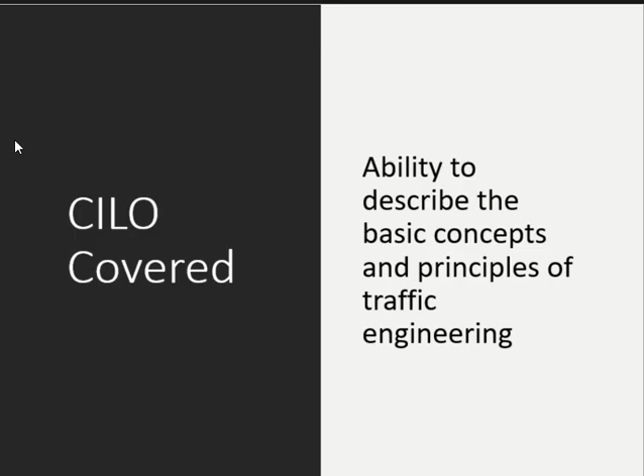The other thing you will commonly see is the course outcomes we are trying to fulfill in this course. In the slides you will see which outcome the topics are covering. These topics cover the basic concepts and principles of traffic engineering. So let us begin.

We start with the definition of a traffic stream. A stream, you may have heard the word for water streams, right? If you have gone to the water resources lab, they flow the water and show you how the waves are made and what happens with the silt and sand and so on. Doesn't work here, but there is something like this, right? Should be, okay.

So a stream means flow, right? We have data stream, water stream. When I say data stream, what is flowing? The data. When we say water stream, water. So traffic stream - but traffic is jammed, right? It doesn't flow. Agreed or not? So this is wrong then, right?

For the sake of the class, we will assume there is a traffic stream as well - forget about 7 a.m. and 5 p.m. traffic. So traffic stream means flow of vehicles. Traffic is made up of vehicles, right? So a traffic stream is made up of vehicles mainly. For the time being, these vehicles are driven by drivers, us, unfortunately.

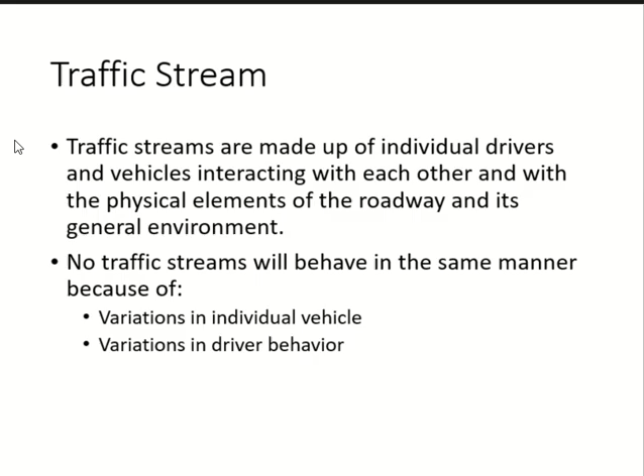Now, in the textbook and in the slides, I keep on referring to the textbook, at least so you know when I say what is written in the textbook. You will not read it, I know, but at least I am telling you this is what is written in the textbook.

When they say traffic facilities in the textbook or in the slides, they mean streets and highways. Clear? On the broader level, it can also include parking spaces as well, so parking spaces are also part of traffic facilities. This is the term they use. So when they say types of traffic facilities, they mean types of streets and highways.

What are the types of streets and highways? Tell me. Local, arterial, collector, urban and rural.

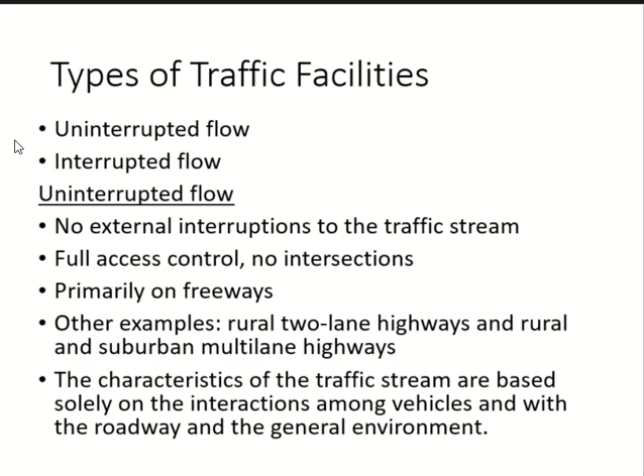But the point is that if you see the traffic jam, it's because the traffic on the highway is very high. If you see the speed is low, maybe the design speed of the highway is low. It's not because of something else. On the other type, the interrupted flow highway, you may see traffic is stopped, not because of this highway, but because of the access, because of the interruption. Got my point?

If there is nothing on the intersection, but the intersection is there, like on most local streets, you may not see any signal or sign or roundabout, but there is a street crossing, so it will be considered as interrupted. We are not looking at the sign, we are looking at the interruption itself. The interruption is the other street, not the sign. If I remove the sign, it doesn't mean nobody will come from the other side. Clear? So the interruption is the street itself.

Similarly, you can have entries and exits from parking areas. These are also considered an interruption, because these people are entering and exiting the street. So when they enter and exit, we may have to stop for them. Driveway means the parking is somewhere inside, like you're coming out of the mall. You come from the parking area, then there's a small lane in which you drive before you come to the street, right? That small lane is a driveway.

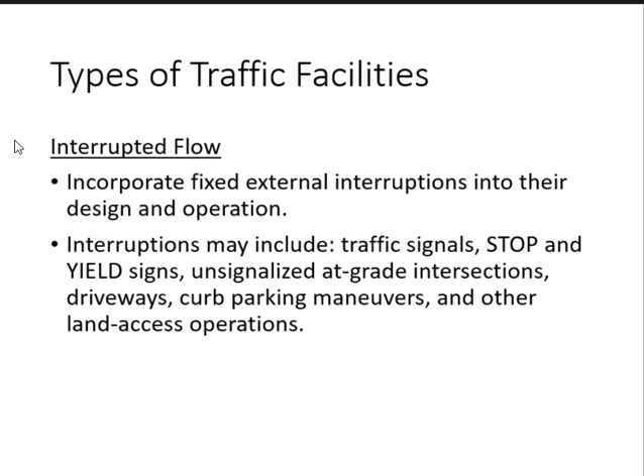Okay. So when we study traffic stream, we have to study certain parameters, certain properties of traffic, and these properties can be divided into two types. So this is now types of traffic parameters, traffic characteristics. Okay, those were types of what? Interrupted and uninterrupted. Types of what? Traffic flow. Highway traffic. Those were types of highways based on traffic flow. And this is now types of traffic flow properties, traffic flow parameters, and they can be macroscopic and microscopic.

Okay, you know microscope, right? So which one is bigger, macro or micro? Macro is bigger, right? That's why we have the store Makro, right? We don't have the store Micro. There's a store Makro, right? No? Okay. You need to go out more. Okay. But macro is bigger, right?

So bigger means you are collecting data about the whole traffic flow, the whole traffic stream. That is called macro. And if you go in more details, then we call it micro. So if you are looking at the traffic flow complete, it's macro, the scale is bigger. If you go to a smaller scale, then we call it micro. If you go inside the traffic stream, a traffic stream is made of what? Vehicles, right? So micro means you are looking at each vehicle. Macro means you are looking at the entire group of vehicles in the traffic flow. Clear? Okay.

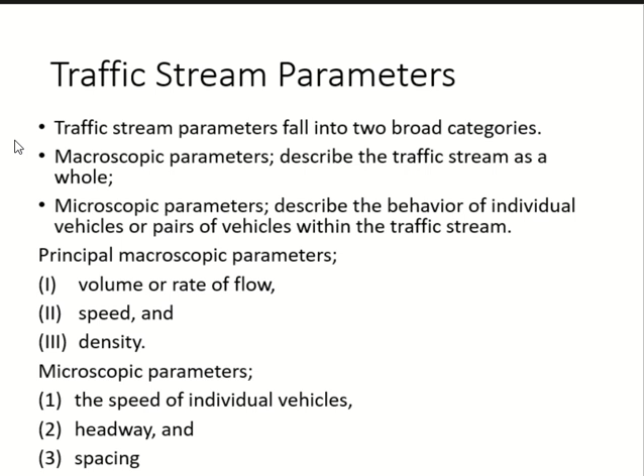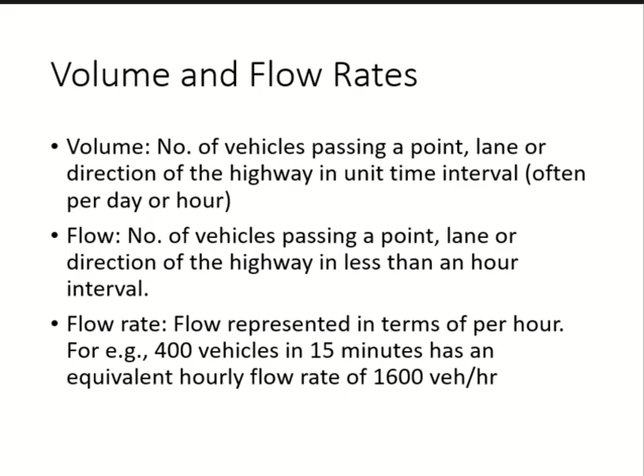It was confusing. So that means in 1 hour I can have multiple values of rate of flow. In 1 hour I can take a value for 15 minutes, convert it to 1 hour, it will be one value, right? Next 15 minutes I take another value of flow and convert it to per hour. It will be another value of flow rate. But in the whole hour the volume will be one. The flow rate can change. Clear?

So we said volume can be more than 1 hour. Usually the time interval for volume is per day or per hour. If it is per day, we call it daily volume. If it is per hour, we call it hourly volume. In some cases, we use other time intervals as well. Volume can be for the whole year as well, or for 1 week. Still volume. Anything 1 hour or more, still volume.

Daily volumes are used for planning purposes or documentation. You are planning a new highway for the future, after 20 years. You plan for it, you construct it, and after you construct it, it should remain operating for many years, right? Even 20 years is less. You want the highway to run for maybe 30-40 years. So in your planning, you are looking at the volume of the future after 30 years. So in those cases, we use daily volume. Why? What's the reason?

It's easier to calculate daily volumes because they have less variation. If you go deep, then the variation will be higher. For example, if you say I want volume for every hour for every direction, more variation, right? You will need more values. But for the entire highway for the whole day I will have one value. And daily volumes are normally combined for both directions.

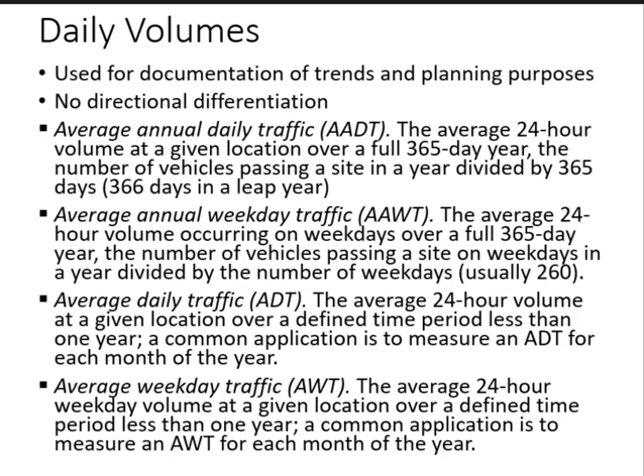And the other one, A is gone. So average of what? Weekdays. Clear? So the first two for the whole year. In the first one, all days of the year. Second one, only weekdays of the year. Last two, less than 1 year. The third one, less than 1 year, but all days. And the last one, less than 1 year, only weekdays. Clear? But in all cases, we are taking an average. We're looking for an average value.

So for example, if we have this example, very easy. The values are given for each month, and the totals are also given. This is total, all days. This is total only for weekdays. So if I go for the first value, which was AADT, what should I do? AADT meant the whole year, all days. So how do I calculate the average of the total of all days for the whole year? What do I do? Yeah, which vehicle number? This one. Right? Clear? Easy? Okay.

And what should I do for AAWT? The second one, which was for the whole year, only weekdays. Sorry, say again. Take total weekday and divide by days, 260. This number. Yeah. Because you are only taking weekdays, it will be divided by the number of weekdays. Clear? Okay.

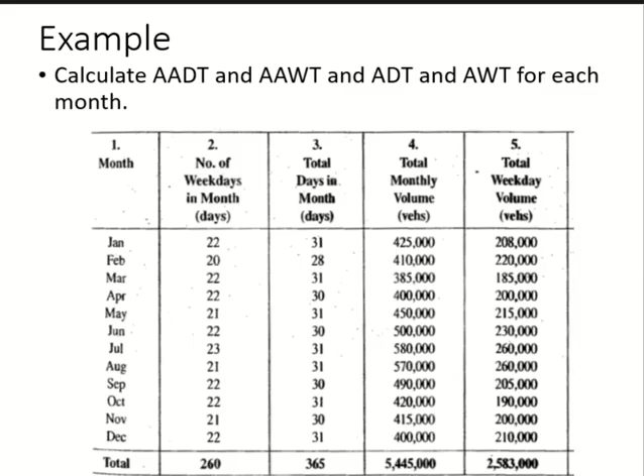Okay. So hopefully you will remember it till the exam. But are there any problems? You can do this, right? When I ask you can do this, I feel like a motivational speaker. You can do this. Everybody says yes. And like those talks, nobody does anything, right? They come to the next speech, right or wrong? I see people know very well. Okay.

Then we have the hourly volumes. So the volume can be daily, and volume can be hourly as well. Hourly volume is used for design. If you have to design a highway, a signal, a roundabout, a parking facility, you will use hourly volume. What was the purpose of daily volume? Design the street for... Any better answer? Somewhat correct. Did I use the word design there? Documentation or planning? Okay, planning. Yes. This brings me to another point.

When you design the highway, for design we are using hourly, right? Are you designing it for this year only? The highway should run for many years, right? So this should also require future value, the value which I have for planning, which I planned for future. And that value is what? Daily. So this is how it is done.

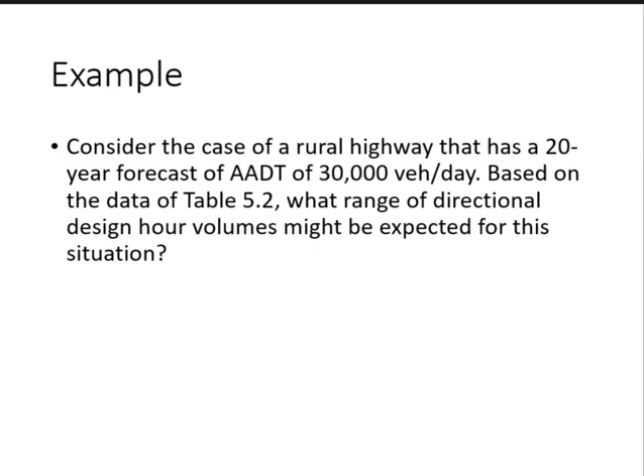So based on the data from this table, we have to find out the... one thing which I forgot here. The hourly volume which we are using for design, we call it DDHV: directional design hourly volume. So it is in one direction, it is used for design, future, and it's hourly.

If you know the term, even AADT, ADT, AWT, if you know the term then you know what to do with it, that's why I'm emphasizing on it. So this is for one direction. So you have daily, which is for both directions, you multiply by D, it becomes directional. It's for future, so design. And then we have hourly volume, so you have to multiply by K as well.

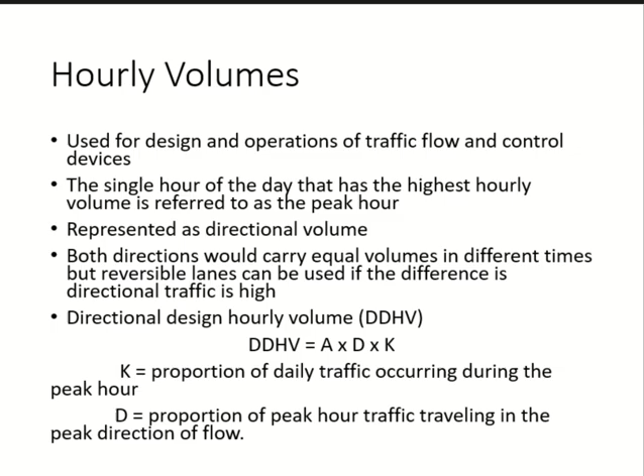Clear? Okay, so we are doing it for a rural highway. For rural highway, the ranges are K 0.15 to 0.25, and D 0.65 to 0.8. So this is the equation. My A value was 30,000. Now you have two options here, right? You have the whole range here. So let us try the full range.

Let us see what we get. So if you take the lower values of the range, what do you get? And if you take the higher values, what do you get? Now this is not per day anymore, now what, vehicles per hour. This was day, to convert to per hour, right? And this is 6,000. Any confusion here? Okay.

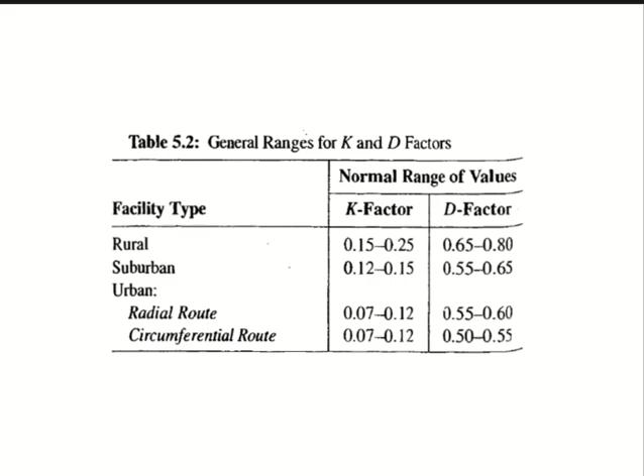Then we have the sub-hourly, meaning when you take the value for less than one hour, and we already said that it can be flow or rate of flow. Which one of them is per hour? Flow is per hour? Rate of flow. Rate of flow is per hour. Flow is less than one hour, the value as it is. And the rate of flow, you have to make it per hour. That's why we call it the rate of flow.

Now the point could be that we take this hourly volume and you start the design. Did we consider what will be the flow, what will be the rate of flow in this hour? So let's say this is for 8 to 9 a.m., and in 8 to 9 I'm expecting 6,000 vehicles. Will these 6,000 vehicles come at equal intervals, so every minute I have like 100 vehicles, something like this? No, they are unequally distributed, right? To look at this unequal distribution, I need the flow and rate of flow. I'm looking at within the hour, inside the hour, what is happening. So I have to look at flow and rate of flow.

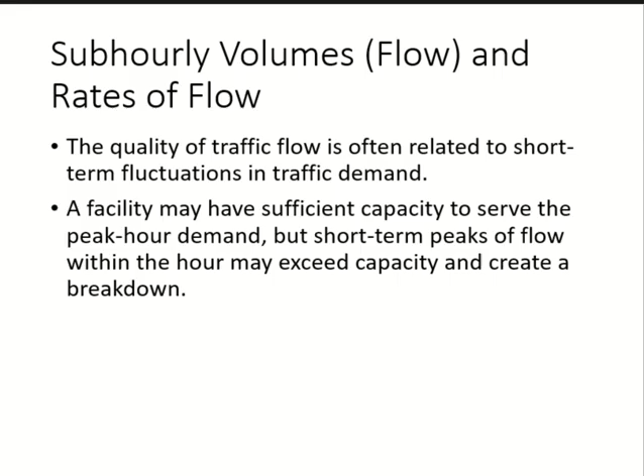On that point, it will start failing. This is what happens on the highway as well. I'll just show you before we leave the class, and then we will look at the solution later on.

So you have the total volume, 4,200. You have the value for each 15 minutes, and we call it flow. Each value is converted to 1 hour, and we call it rate of flow. Rate of flow can be for each 15 minutes because the flow is for each 15 minutes. Now, if you don't consider these values, forget about all these rows.

We look at what? 4,200. So I'm designing the road for 4,200. This is not how we do it, that's just to explain the point. If you ignore the flow, what can happen? This is just to explain the point. The real process is this one.

This will show if you ignore the flow, what can happen. So if you design for this one, 4,200 in 1 hour, equally distributed in all 15 minutes, how much in each 15 minutes? Tell me, 4,200 total, equal distribution, how much for each 15 minutes? 1,050. So if I go with equal distribution, my total is 4,200, and for every 15 minutes, 1,050.

Now see what has happened. First 15 minutes, actual flow is 1,000. How much did you assume with equal distribution? 1,050. Good or bad? Good. Next 15 minutes, actual flow 1,100, my equal distribution is 1,050. Good or bad? Bad.

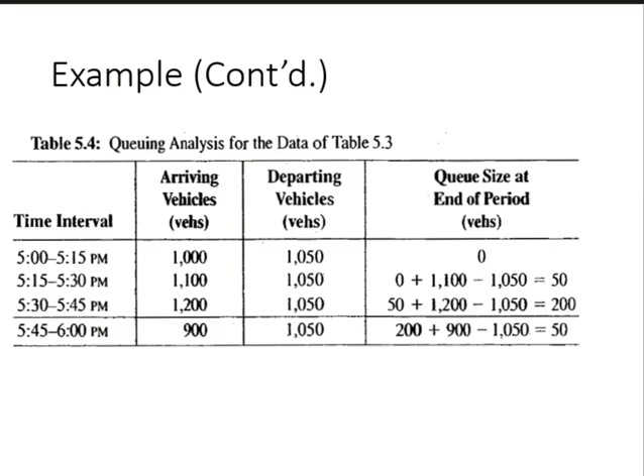Now you did not reach your capacity. What was your capacity? Did you reach it? No. Why not? Because you did not consider what is happening with the distribution. So if you just design on the basis of total, your highway will fail. In the same way, the structure will fail. The slab will fail from one point and start to fall down, and you will be thinking, I had the same 6-ton load, how can I fail? Or how can it fail? It will fail.

Clear or not? So we have to introduce another factor to accommodate for this variation of the flow as well, which we will talk about next time.

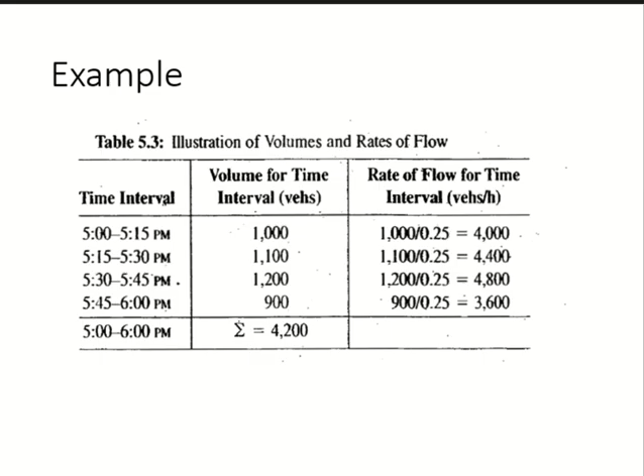Can I... Can you what? Listen to it. Yeah, now you can listen. We are finished. Really? Perfect.